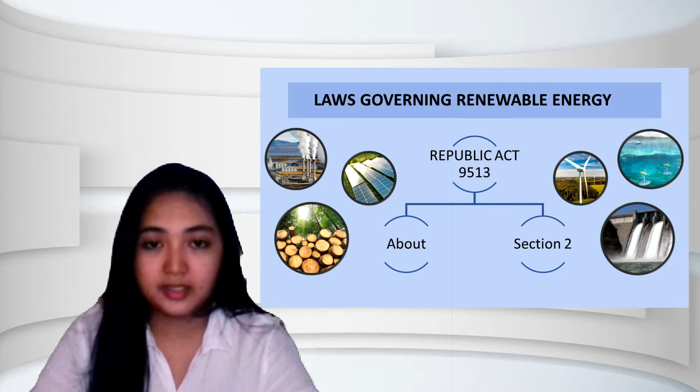Republic Act 9513 was enacted in December 2008 to reaffirm the government's commitment to accelerating the exploration and development of renewable energy resources. It aims to reduce the country's dependence on fossil fuels and thereby minimize the exposure to price fluctuations in the international market.

Under Section 2, renewable energy resources include biomass, solar, wind, hydro, geothermal, and ocean energy. Section 2 also aims to increase the utilization of renewable energy by institutionalizing the development of national and local capabilities in the use of renewable energy systems and promoting its efficient and cost-effective commercial application.

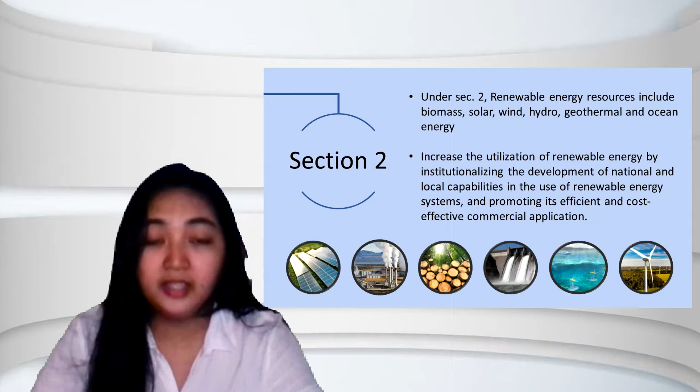It is also to encourage the development and utilization of renewable energy resources as tools to effectively prevent or reduce harmful emissions and thereby balance the goals of economic growth and development with the protection of health and the environment. And lastly, it is to establish the necessary infrastructure and mechanisms to carry out the mandates specified in this Act and other existing laws.

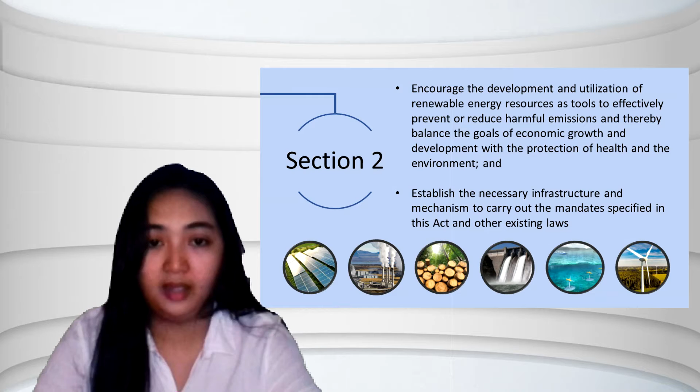Biomass energy and its basic concept for power generation. Biomass contains energy first derived from the sun. The plants absorb the sun's energy through photosynthesis and convert carbon dioxide and water into nutrients. The energy from these organisms can be transformed into usable energy through direct and indirect means. When biomass is burned, stored energy is released as heat that is converted into electricity or processed into biofuel.

Types of biomass energy conversion. First is direct combustion. It is the burning of biomass in the presence of oxygen. It is a proven technology widely used to convert biomass energy into heat or electricity with the help of a steam cycle, which can be stoves, boilers, and power plants.

These processes are applied from a very small scale for domestic heating up to higher ranges to produce electricity. Biomass could be used as the only fuel, but it is also possible to apply co-firing, which has important advantages. Co-firing is the burning of biomass mixed with a fossil fuel such as coal.

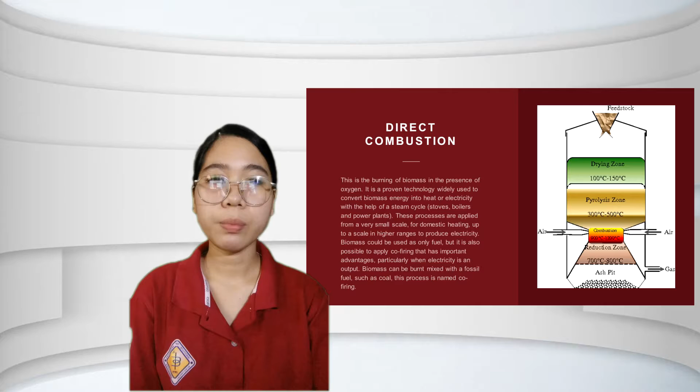Next is the thermochemical processes. Thermochemical processes entail the application of heat and chemical processes in the production of energy products from biomass and can be subdivided into pyrolysis and gasification.

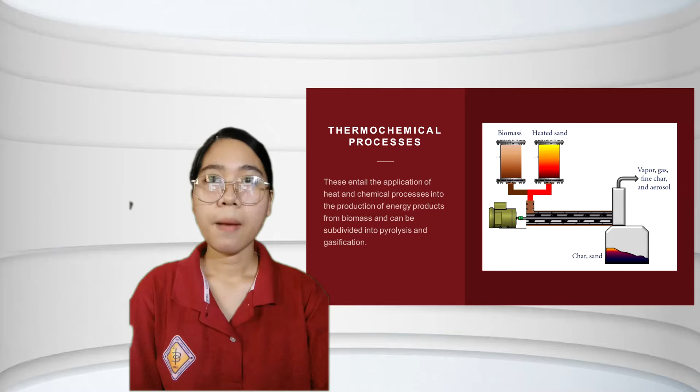Pyrolysis is a thermal degradation of a substance in the absence of oxygen. In this process, biomass undergoes partial combustion and is decomposed by heat without producing combustion reactions. The basic characteristic of this process is that the only oxygen present is the content of the waste to be treated, at working temperatures ranging between 300 and 800 degrees Celsius. As a result, liquid fuels and a solid residue rich in carbon are obtained.

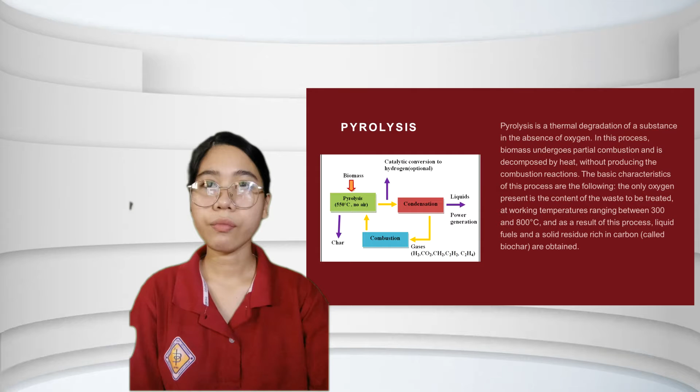Next is gasification. Gasification is a thermochemical process in which biomass is transformed into a combustible gas known as syngas, or synthesis gas. The operating temperature ranges between 700 and 1400 degrees Celsius depending on the type of technology used and the conditions of the process, and a gasifying agent, which may be water vapor, oxygen, air, or a mixture of these.

The gas generated is more adaptable than the original solid biomass, and it is characterized by its low or medium calorific value. It can be exploited in various ways through combustion processes to produce electricity and/or thermal energy, or as synthesis gas, transforming it into products with higher added value.

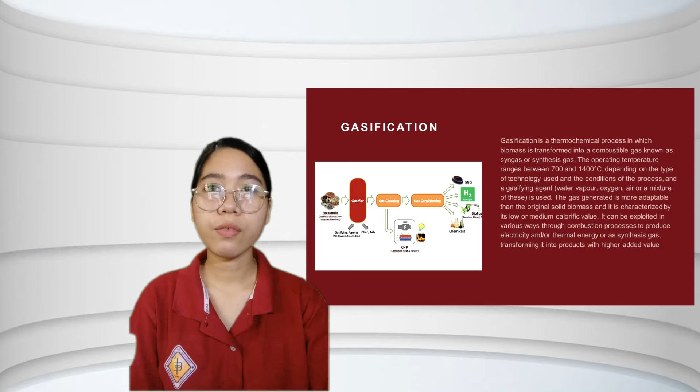The next type of biomass energy conversion is the biochemical processes. The biochemical process of transformation of biomass into gaseous or liquid fuels, such as biogas or bioethanol, is supported by different types of microorganisms. These microorganisms, whether contained in the original biomass or added for the process, produce the degradation of the complex molecules of the biomass into simpler compounds characterized by their high energy density. These procedures are usually applied in the case of natural or residual biomass with a high moisture content. The most used biochemical technologies are anaerobic digestion and alcoholic fermentation.

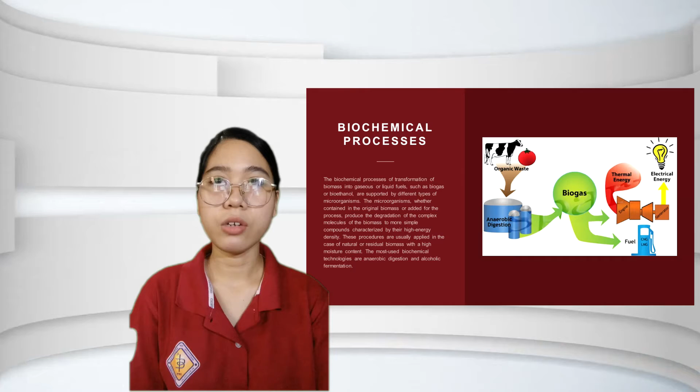Anaerobic digestion is basically a fermentation process. The biomass is transformed through bacterial action without oxygen, producing a gas compound of methane and carbon dioxide that can be used to produce electricity through gas turbines, or in heat and steam processes.

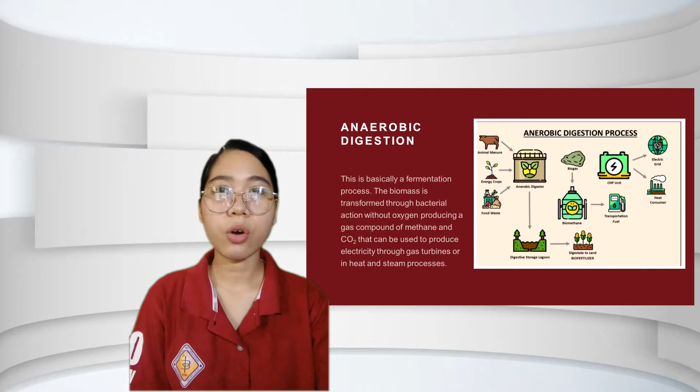Alcoholic fermentation is a variety of biofuels that can be produced from waste resources, including liquid fuels such as ethanol or methanol, that can replace significant quantities of fossil fuels in many transport applications. Biofuels are produced through chemical reactions: transesterification and esterification.

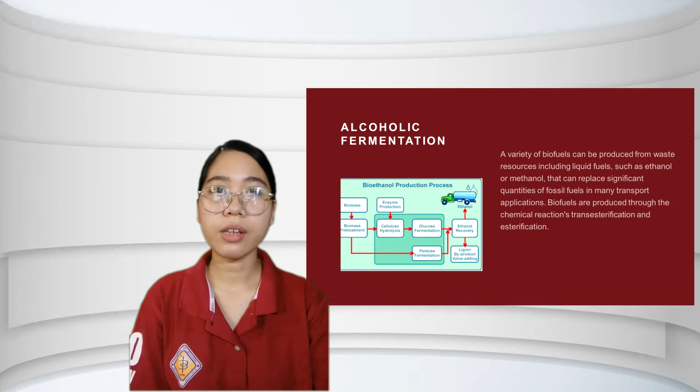Transesterification is the process in which fat or oil reacts with an alcohol to form esters and glycerol. In the transesterification process, a glyceride reacts with an alcohol, typically methanol or ethanol, in the presence of a catalyst, forming fatty acid alkyl esters and an alcohol.

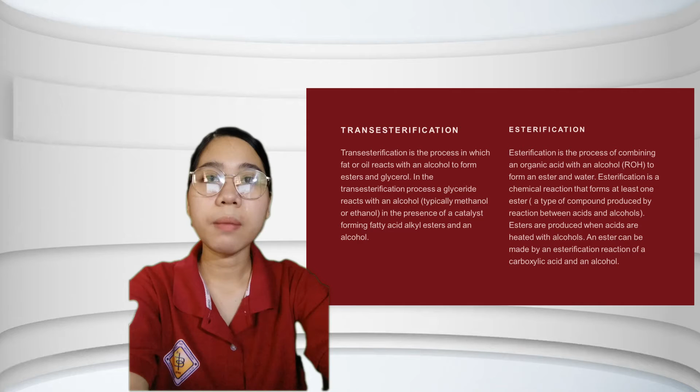On the other hand, esterification is a chemical reaction that forms at least one ester. Esters are produced when acids are heated with alcohol. An ester can be made by an esterification reaction of a carboxylic acid and an alcohol.

Now let us proceed with the design of a biomass power plant. The design of a biomass power generation plant varies with the type of conversion that the power plant seeks to undergo. As mentioned earlier, during the brief and detailed explanation of the biomass conversion processes, since there are many types of conversion processes in biomass energy, let us just focus on the main, or the most common, biomass process that is involved in the most common biomass power plant.

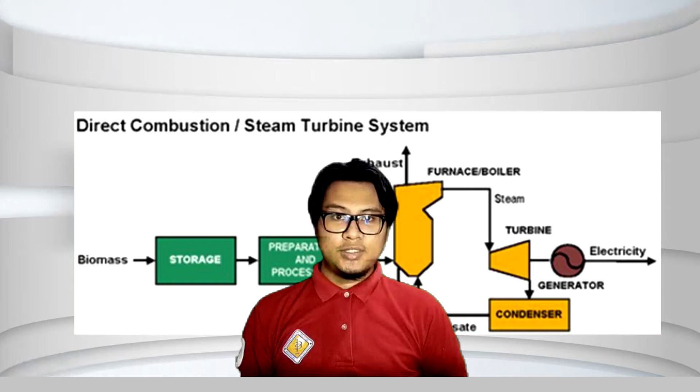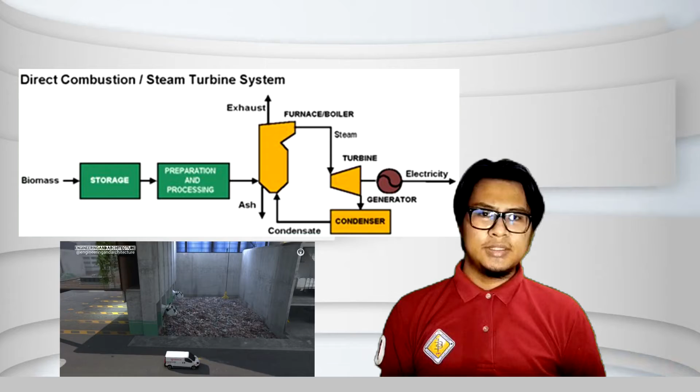The thermochemical process called combustion, incineration, and direct combustion system. The first part of the design of a biomass power plant in a combustion or direct combustion process is the storage of the feedstocks or the biomass. This is where the feedstocks are stored to be used for the next stage.

The second part of the design of a biomass power plant is the pretreatment part, where it is pretreated depending on the mode of treatment that a company provides.

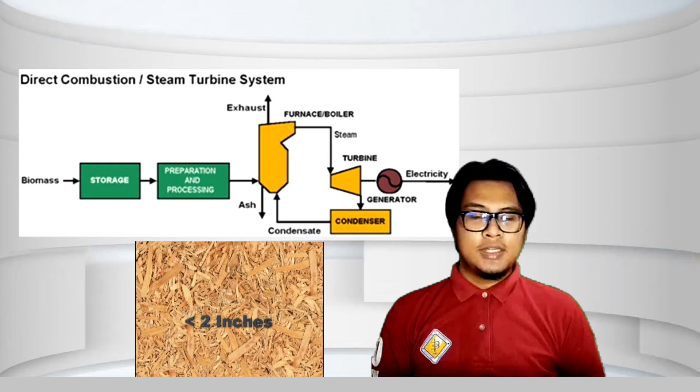The next part of the design of a biomass power plant is the main part of the whole system, probably the most important one, since it involves the thermochemical process called combustion. The incinerator, or the combustor, or some would say the burner or furnace.

This is where the feedstocks are incinerated at high temperature, which may reach up to 1000 degrees Celsius. The combustor or incinerator has different parts, including the burner itself, the igniter, and the control panel, which makes manipulation of the parts a lot easier.

The next component of the design of a biomass power plant involves the filtration process of the system. Since smoke, ashes, and byproducts are present during the process, they need to be filtered before being emitted into our environment. The filtration process includes a part wherein a cyclone separator might be present.

A cyclone separator separates the particulates or solid particles from the gaseous particles. The second part is the filtration bag, which filters the air that is emitted into the environment.

The last part of the design would be the cogeneration plant of the power plant. This is the main component of the power plant used to generate electricity in a certain area, and of course, to reuse the residual heat provided by the power generation.

The cogeneration plant consists of three main parts: the turbine or steam turbine, the generator, and the condenser. The steam turbine acts as the revolver for the generator, powering it up since it is connected to it. As the turbine spins, the generator revolves, thus generating electricity.

The condenser's main purpose is to deliver the residual steam back to the combustion chamber, or boiler, by converting it into a liquid and running it through high pressure pipes to be boiled again and release high pressure steam once more.

The design of a biomass power plant changes as the process of conversion also changes. But some of the parts in the system remain the same, such as the cogeneration plant and the filtration process, as all of the thermochemical processes follow the same principle.

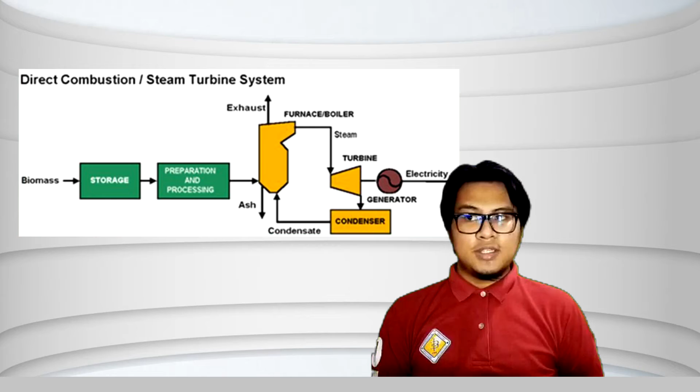Take for instance the thermochemical conversion process involving gasification. The part where the incinerator is present is then modified into a gasifier. The same goes for pyrolysis, and so on.

So that's all for the design of the biomass power plant. Next up would be the plant operation in the biomass power plant.

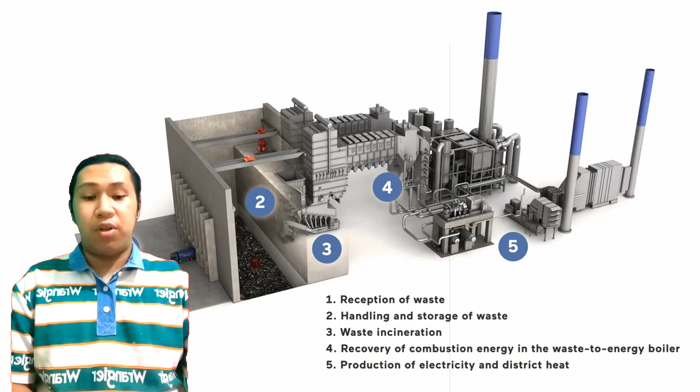Operation of a biomass generation power plant has 5 phases. The first phase is the reception of waste. In this phase, the power plant receives organic waste material such as plant waste, house waste, or waste from fermentation. These types of waste are also available in large quantities.

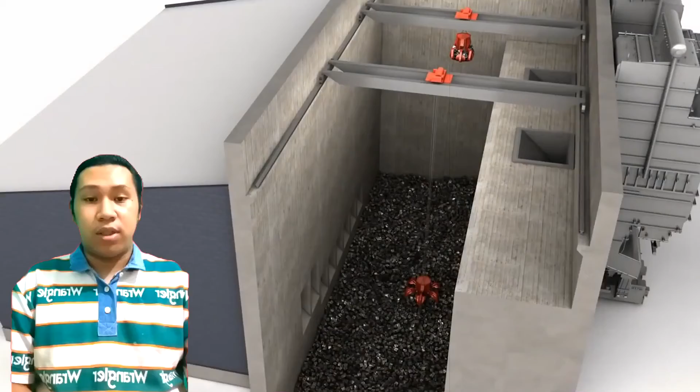The second phase is handling and waste storage. In this phase, the gathered waste will be shredded, mixed, and rinsed to a uniform quality before the waste goes to the third phase, which is waste incineration.

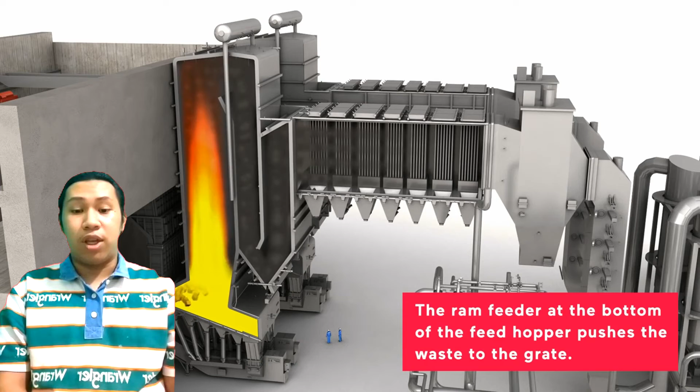This phase is where the waste is introduced to a combustion chamber where it produces heat as it burns. Inside the heat boilers, there are tubes filled with water lined inside. Then, when the hot water is produced, it is sent to a tank where the water becomes steam.

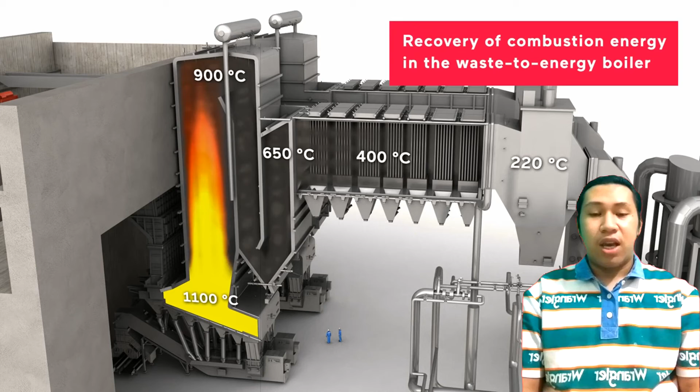The fourth phase is recovery of combustion energy. In this phase, the residual gases from the incineration are cleaned with lime that absorbs sulfur dioxide, and activated carbon. Bag filters are also used to collect impurities and heavy materials included in the gases.

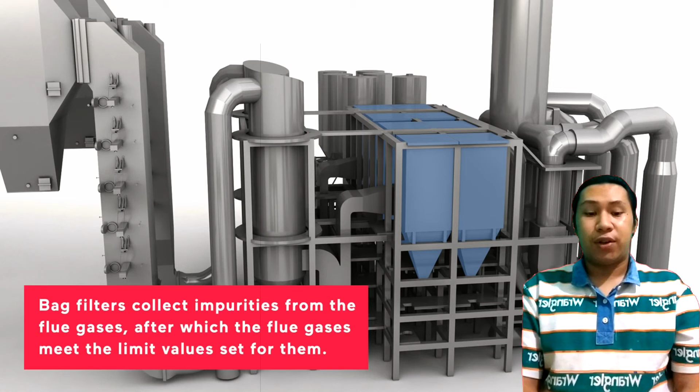Steam is also recovered in this step by entering the condenser, in which cold water circulates and turns the steam back into water. The steam can also be used in other industrial activities and used again.

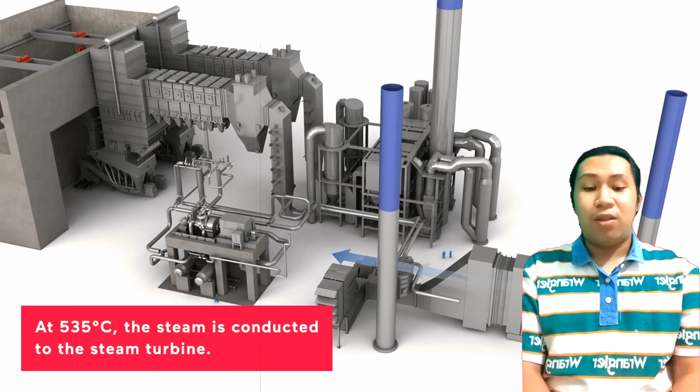The fifth and last phase is the production of electricity. This final phase is where the electricity is produced. The steam goes into a rotor that is designed to turn whenever steam passes through it. It is connected to a generator, where the interaction between the electromagnets of the moving rotor and the copper coils of the stationary stator produces electric current.

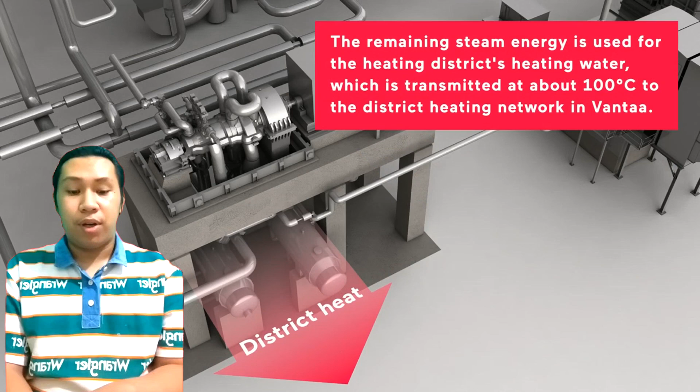These turbines transmit generated electricity to a nearby transformer of an electric grid, or to be stored and ready to be used.